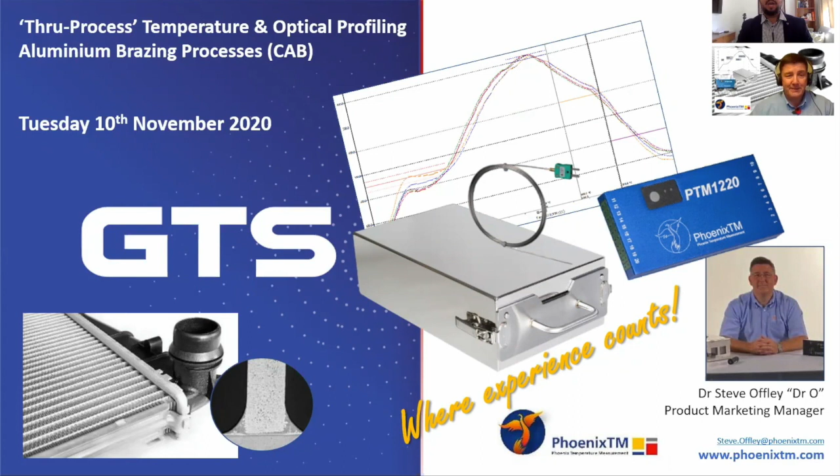So tell us a little bit about yourself, Steve. As you've introduced, my name is Dr. Steve Offley, but those who know me well probably know me more by my nickname, Dr. O. The O is because of my surname, but being in the heat treatment industry for over 25 years, I have worked with ovens and furnaces a great deal, so my nickname since the early days has been Dr. Oven. So Dr. O is what they call me, and that's who I am.

And I'm pleased today to present on through process temperature monitoring of brazing processes. As product marketing manager at Phoenix Temperature Measurement, my desire is to introduce new technologies into the heat treatment industry for monitoring and measuring both product and process temperature continuously, particularly for continuous ovens and also for surveying in batch applications.

Excellent. Yeah, actually the GTS expertise is in measurement, so this is just the perfect webinar to end this season.

Excellent. So, Dr. O, what are we going to see today? What are the contents of this presentation?

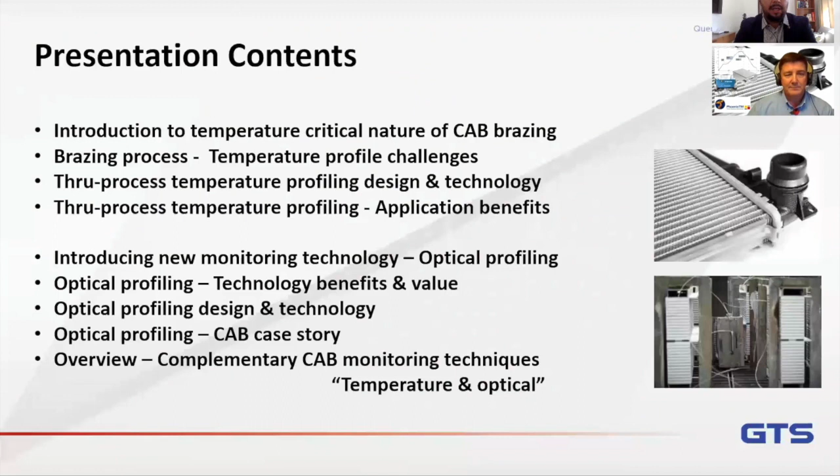Excellent. So the first thing that we need to discuss is the brazing industry. When we talk about industry, what kind of parts are we talking about?

Okay, so whenever we're talking about aluminium brazing, the first thing that comes to mind is the manufacture, particularly in the automotive sector, of radiators, condensers, evaporators, and a whole host of different products whereby you have an aluminium substrate which has to be physically manufactured by joining aluminium parts using the brazing principle. So using the filler alloy to complement the aluminium and create this permanent bond between aluminium filaments, whether it be the pipes or the fins in the radiator itself.

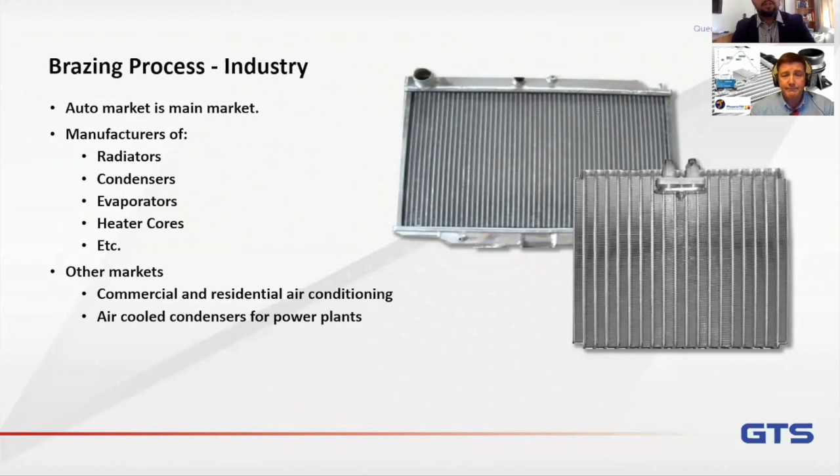Right, so there's one thing that we need to consider here.

In the past events about brazing, we talked about other materials like copper, bronze, stainless. When we talk about aluminum, we have a particular challenge, right?

We do. Well, the first challenge is you call it aluminum, I call it aluminium. So there we go, that's our first challenge of today's presentation.

But yes, the challenge you quite rightly allude to, Victor, is the fact that we're selectively melting the filler metal with the aluminium. So what we don't want to do is take the temperature of the filler metal too close to the temperature that the aluminium substrate or parent material could potentially melt.

That temperature window is quite tight in aluminium brazing, because typically the filler alloy is going to be melting between 580 to 620 degrees. And as we all know, aluminium will melt close to around 650, 55 degrees Celsius.

So we need to be fairly accurate as to how we control the temperature of that radiator to prevent potential damage to the substrate in the brazing process itself. But we also need to be able to control the temperature of the filler alloy so that it melts at the right rate, and then it flows, and with the capillary action, it fills the joint where you want the physical connection to be made, which is then reliable and will give the physical strength to the product post the brazing process.

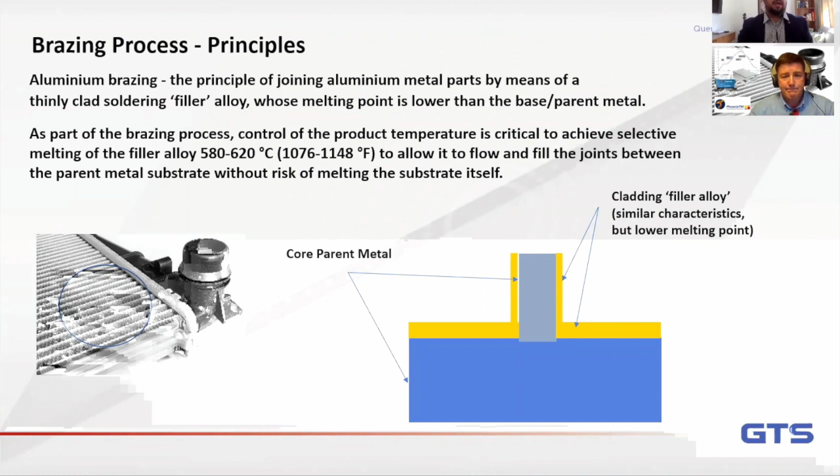So we need to talk about controlled atmosphere brazing, right? We are, and that's what the majority of this presentation will be on, is the monitoring of CAB processes, controlled atmosphere brazing, where you've got an environment inside the furnace which is being controlled to overcome the one pitfall of the aluminium brazing process, which is the formation of aluminium oxide.

Because if you don't control the environment inside the furnace, the oxide layer forming on the substrate itself will prevent the alloy filler metal from flowing correctly into the joint, and you won't get the good fixing and secure point between the pipe and the fin, which could cause degradation or failure in the field.

Correct. So in the CAB furnace, we're trying to remove both oxygen and water to avoid oxide formation on the part. But we're also going to be using flux technology to enable us to clean the aluminium surface itself, to remove any residual oxide post degreasing operations.

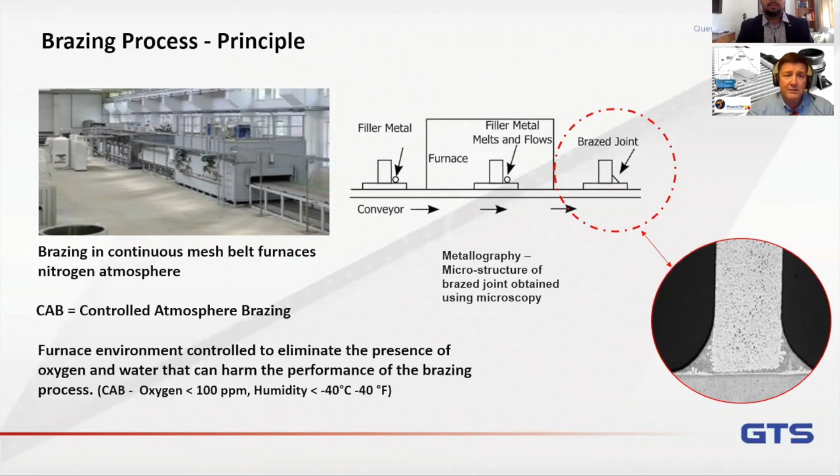On our first webinar of this season, we talked about vacuum brazing. The nice thing about vacuum brazing is that because of vacuum, you remove all the contamination by mechanical means. Although the problem with vacuum is that the production rate is limited. So most applications, especially in the automotive industry, will be run on a continuous furnace with controlled atmosphere brazing. So that's the reason we need to talk about flux.

So right now we already discussed temperature, atmosphere, flux, but there are other critical factors that we need to have in mind, right? There are, and I must admit I have to put my hand up and say I nicked this from somebody else's presentation, the 7 critical steps to brazing.

But the reason I put this slide up here is the fact that along with selecting the correct alloy and cleaning the material so that there's no oxide, there are 3 items in this list that are all temperature critical. So it just emphasizes how important temperature control is in the brazing process itself.

Now, furnaces come with fairly sophisticated control systems these days, but at the end of the day, you need an independent way of understanding what's actually happening inside the furnace. What's the temperature of the product? Because the furnace control system tells you what the ambient temperature inside the furnace is, but it's never going to tell you what your product is actually experiencing.

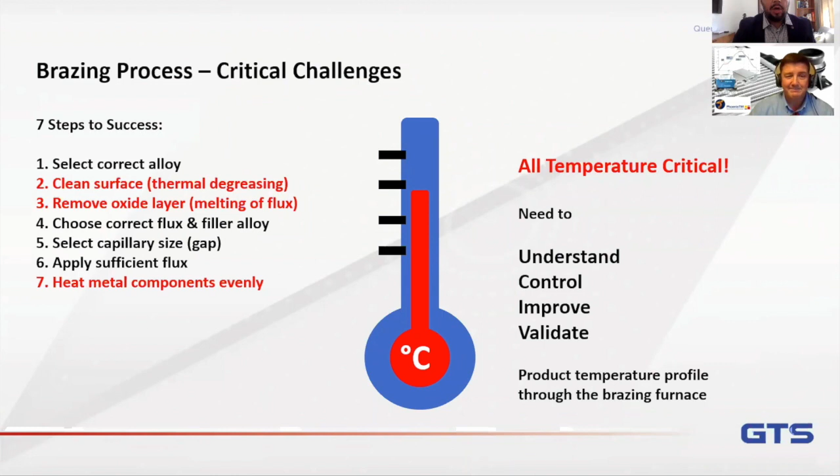So let's talk about chemistry and the thermodynamics inside the furnace. Certainly, Victor, as we discussed earlier, we're both chemists, so this is the sort of stuff that gets us excited. Yes, when you have big names for chemicals and chemical formulas, that gets me excited. We are a couple of nerds.

If we take that list of 7 things important in brazing, we've identified that 3 of them are temperature related. In the manufacturing process of brazing, the first major step is to perform thermal degreasing, to remove any hydrocarbons or lubricants that may be poisoning the surface of the product, because if that stays, it's going to cause contamination of the process.

Probably the most important thing is the use of the flux. This is basically, for instance in the Nocolok process, potassium fluoroaluminate, a chemical which eats the oxide layer and leaves the aluminium surface clean for brazing. The product will be sprayed or impregnated with the flux material, which then melts at 565 degrees. That's critical to surface preparation before the braze process.

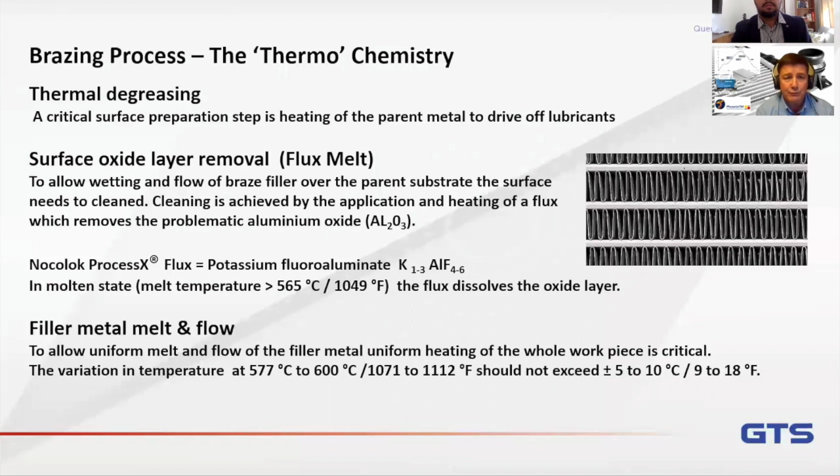Over the past webinars, we've discussed that it's bad to have too much, and bad to have too little. Too much temperature is bad, too little temperature is bad, too much time is bad, too little time is bad. So this is a process that has to be almost perfect. That's the process we're dealing with.

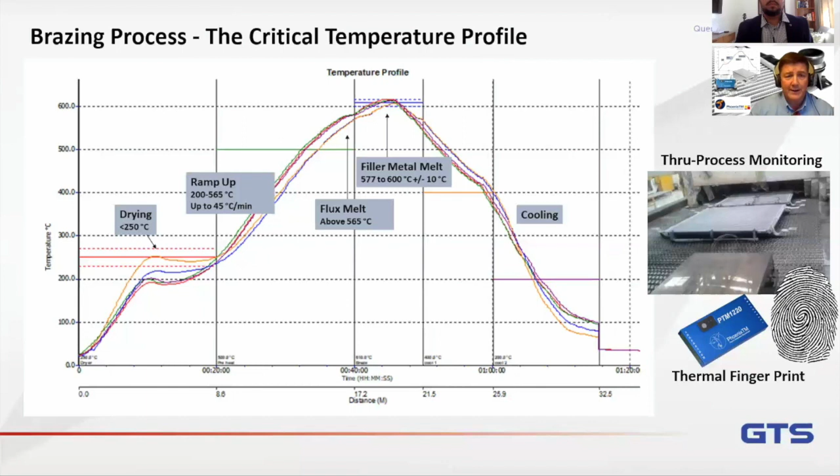That data can be invaluable to understand possibly when things are going wrong in the process, as we'll discuss in more detail later. Correct.

Talking specifically about profiling or temperature profiling, there's a couple of challenges we need to have in mind. Obviously, if we're going to send the data logger through the furnace, we need the thermal barrier, as I've explained. Now what we don't want to do is, by the process of actually doing the monitoring task, influence or affect the actual environment inside the furnace, because as its name suggests, controlled atmosphere - we want to keep that controlled environment in the furnace.

Now traditionally, thermal barriers - the traditional design, which are made up of microporous insulation and glass cloth - can perform an operation we refer to as outgassing. So air or moisture inside the material can actually escape the barrier, and that would then poison the environment inside the furnace. The last thing you want is any air, oxygen or water getting inside an environment where you're trying to remove or prevent oxide formation on the aluminium. So we need to make sure the barrier doesn't contaminate the process itself.

At the same time, the flux material we're using to remove oxide from the aluminium surface - that chemical, if it comes into contact with moisture, can form hydrofluoric acid. That is obviously a very corrosive acid, which doesn't particularly treat things like microporous insulation or glass cloth very kindly. It will eat it away.

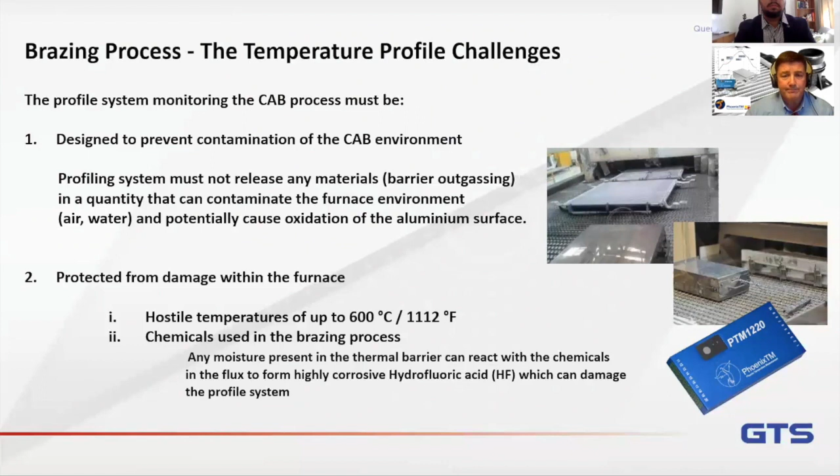Regular thermal barriers that we use are usually focused on traditional heat treatment environments, where in most cases the atmosphere isn't a problem, especially when you're doing vacuum - well, there's no atmosphere, so that's not an issue. But here we need to have in mind the design for the thermal barrier specifically for this type of brazing.

And obviously, the last thing you want is for that dust or material to escape the barrier into the furnace environment, because you're going to create a dust risk or a contamination risk at the brazing or melting part of the furnace process.

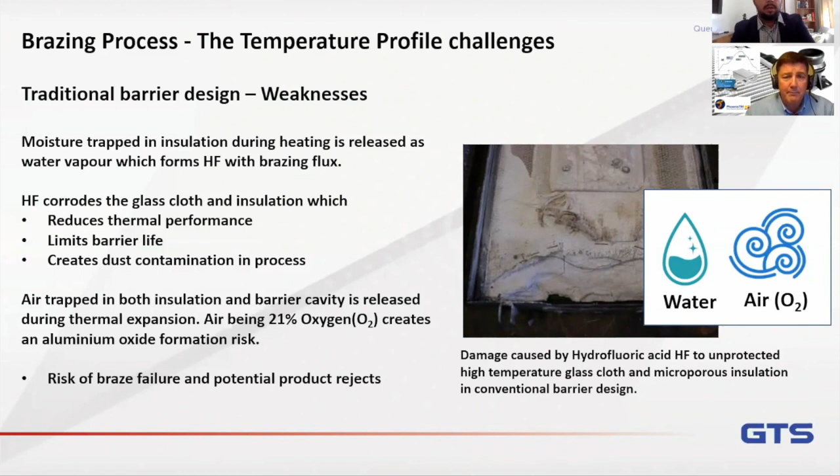So it removes the risk of deterioration of the thermal barrier. The barrier is designed so that in the manufacturing process, it's heated in a vacuum furnace and flushed so that any air inside the material is removed. You can also flush the system before each run to backfill with nitrogen gas, eliminating the risk of any contaminant, oxygen or air inside the barrier escaping as it travels through the furnace.

By the way, do you recommend doing that also for other types of thermal barriers? Brazing is probably the most classic example where this is beneficial.

The obvious downside is you're always fighting in thermal barrier design as to how to reduce conduction effect. Now, if you put metal around the insulation, you're creating a thermal pathway into the barrier. So we had to be careful how we created that balance between the robust nature of the barrier plus the thermal performance.

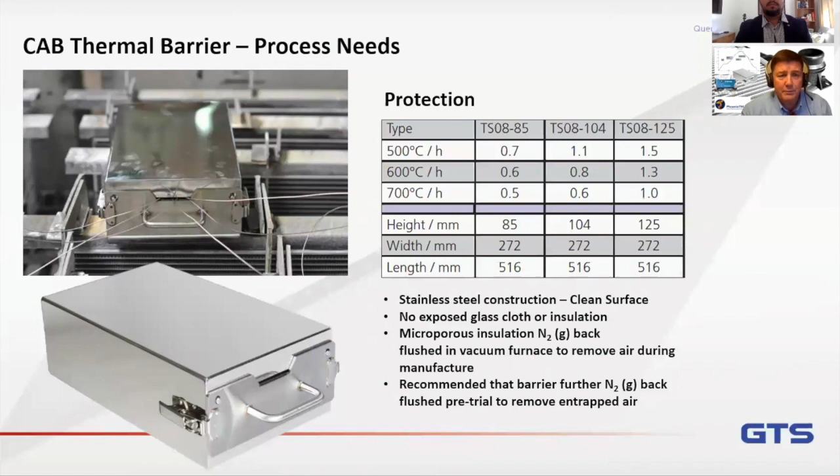But the front drawer type design where you've got the encased insulation is ideal for this sort of brazing application. As you can see from the table, different sized construction and barrier sizes will give you a variety of different thermal performances to match the type of brazing process, the time and temperature that you need for your particular product manufacturing step. I see, thank you Steve.

So we talked about the actual design or engineering behind the thermal barrier, but going back to measurement, one thing we need to have in mind, very important, is the characteristics of the thermocouples. There are many varieties and construction of thermocouples, but when dealing with atmosphere, probably the mineral insulated thermocouple is going to be your best option, right?

It is. That's the thermocouple type we would normally recommend - the mineral insulated thermocouple. Typically a type K thermocouple, which will give you the accuracy we're looking for if it's a special error thermocouple, typically 1.1 degrees Celsius or 0.4%, depending on the temperature you're reading.

It's interesting, thermocouples tend to get overlooked a little bit in any temperature measurement process. My advice to anybody is don't take shortcuts when it comes to thermocouples. You often hear the phrase, a bad workman blames his tools, and often the thermocouple gets blamed for a lot, but it's generally because it isn't being used correctly, or it's not being cared for carefully enough.

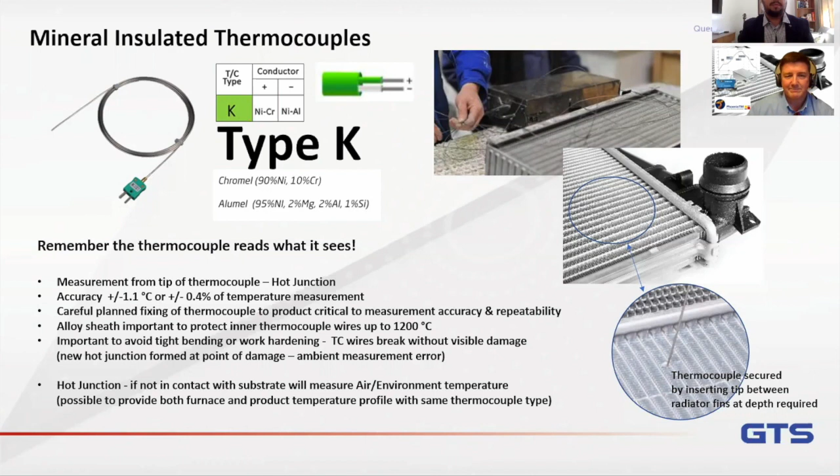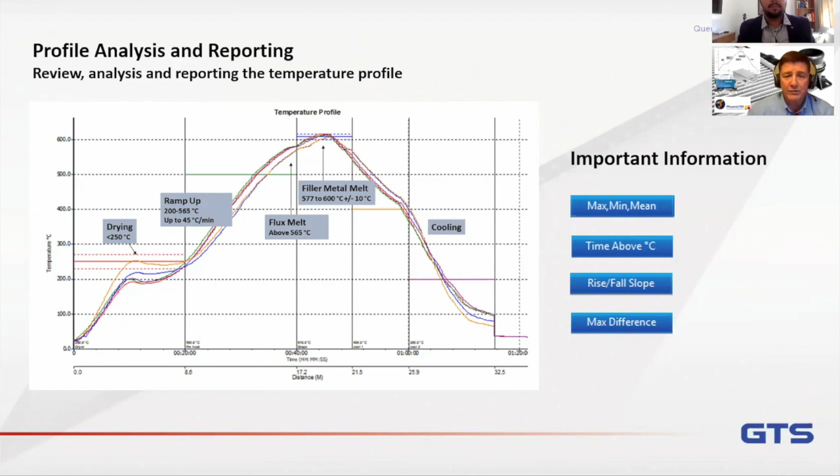Okay, enough of thermocouples. What is next, Steve? Okay Victor, so we mentioned a couple of slides back the profile and how important the shape of the profile is to understanding how the process works. From that profile, there's certain calculations or data you'll need to particularly focus on in order to fully understand whether your braze is being satisfactorily achieved, which we'll look at in more detail on the next slide.

So we've talked about absolute temperature - am I achieving the right brazing temperature, am I achieving the right temperature to melt the alloy? But we've also got to be careful that we've got good control of the heating rate of the process, particularly when we talk about the flux process, which is critical to the surface preparation of the aluminium. If you don't heat that at a uniform rate, if you heat it too slowly, the flux material will dry out preferentially and become less effective in performing that cleaning operation on the surface of the aluminium.

The actual brazing temperature, the critical peak temperature of the profile itself, is obviously critical, and we're looking for uniformity. What we don't want to do is exceed that temperature too greatly, because then you may end up getting close to the aluminium melting temperature, and we can get what we call filler metal erosion, where the alloy metal starts to eat into the aluminium substrate surface itself.

Uniformity across the product is essential, and typically we're looking for a minimum spread of less than plus or minus 5 degrees Celsius over the product itself.

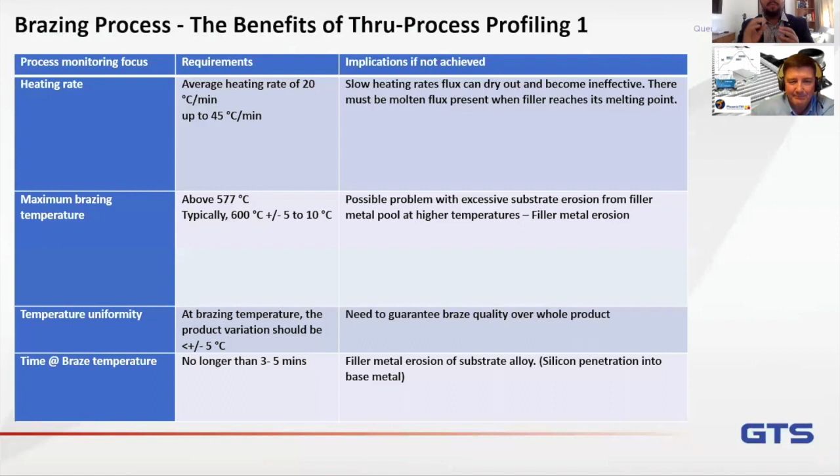I'm sorry, I need to bring that up. Yeah, we get this so many times. But you have a really good point. What can we do to optimize a little bit better our process or our profiling?

Okay, Victor. So obviously, if we're able to measure the product temperature through the furnace, when we're talking about uniformity, we're talking really in this particular case, not the uniformity of the furnace, but we can also use the same technology to talk about uniformity of heating at the product level.

Okay, so different products, obviously different sizes of radiators will heat at different rates. So we can use the profile to see how our range of products vary within each and every furnace, and you may want to then customize your control of the furnace to reflect the type of product you're doing.

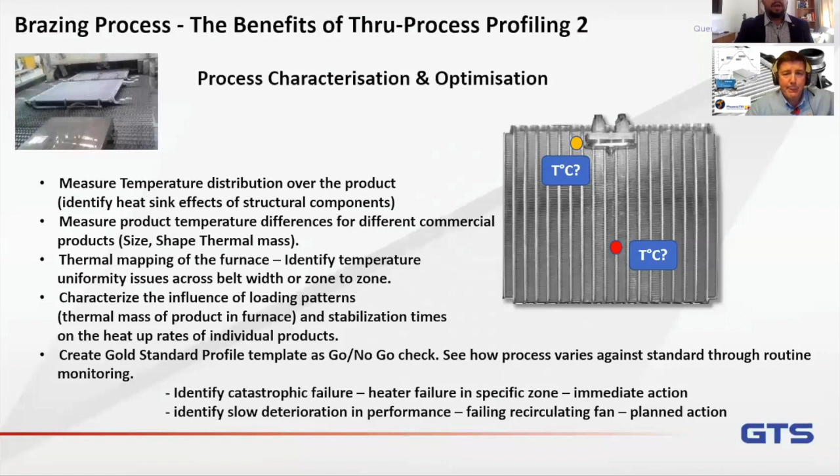Perfect. So I think we have covered so far everything related to temperature profiling. Do you want to go do a summary about this?

Very quickly, Victor, yes, I think hopefully we've shown how important understanding the product profile, the temperature profile of the product in the furnace, is based on the brazing application itself. But obviously it's not an easy application to monitor because of the flux inside it and because you need to control the atmosphere. So you need a technology that isn't going to poison the environment so you can control the atmosphere without any hindrances, but you also want a system that isn't going to be damaged by the hydrofluoric acid potential risk inside the furnace if there's any moisture or air inside the materials.

Because if you've got HF and the traditional type of barrier, you're then going to end up with some corrosion problems, which will affect the long-term efficiency and reliability of the equipment.

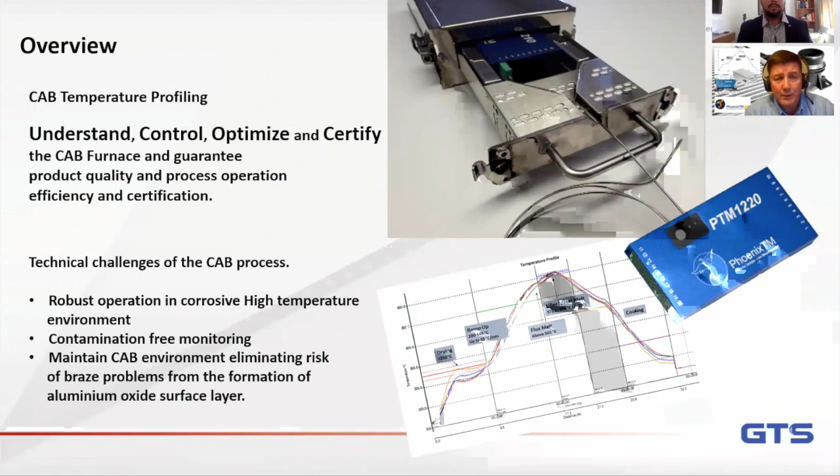Excellent, great. So this is basically all that we have in relation to temperature. But we are looking at this new technology about optical profiling. That's something new. Can you tell us a little bit about that?

Yes. For many years, we've talked about temperature profiling as a means of understanding what happens inside the furnace. But obviously this is focused purely on the temperature inside the furnace. Obviously the furnace operation is to achieve a set temperature on your product, but that's only part of the story. So a lot of customers said, I wish I could get inside the furnace to see exactly what happens or what my product sees. That would be nice.

For a long time, we've been playing around with the concept of, if we can get a data logger through the furnace, why can't we get some sort of video recording device through the furnace safely to see exactly what the product sees as it travels through on the mesh belt? So this is basically what optical profiling is. Instead of measuring temperature, we're actually capturing a video record of what happens inside the furnace.

But the best analogy I can make is it's a bit like your dash cam on your car. Everybody drives along collecting video footage of what the car sees traveling down the road. The optical profiling system does exactly the same thing, it's just the fact you're driving down a brazing furnace at 600 degrees Celsius, which brings its own challenges, as you can imagine. I don't advocate you try and drive your car down the furnace, because it won't work.

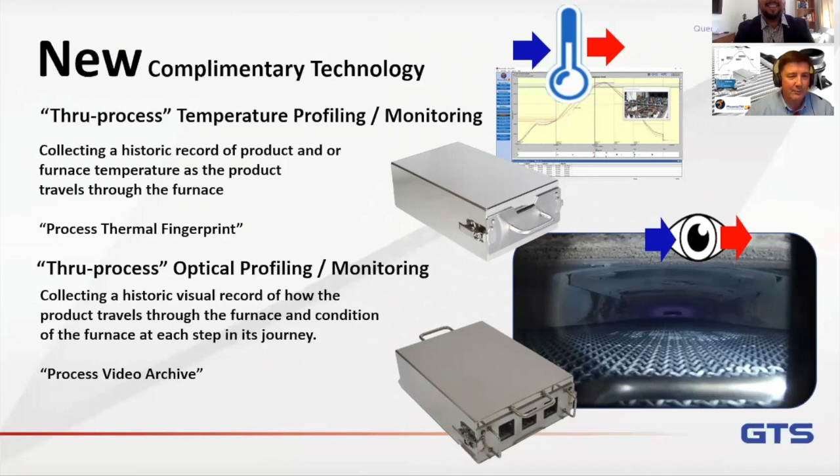So tell us a little bit, what's the difference of the thermal barrier used for this kind of profile? What we've done is adapted the thermal barrier design that we've used historically for the temperature profiling device and modified it to allow the transfer of both a high resolution 4K video camera and also illumination in the form of a torch or torches. So the thermal barrier is designed so that the torch and the camera can travel through the furnace, again, at operational temperatures, so up to 600 degrees.

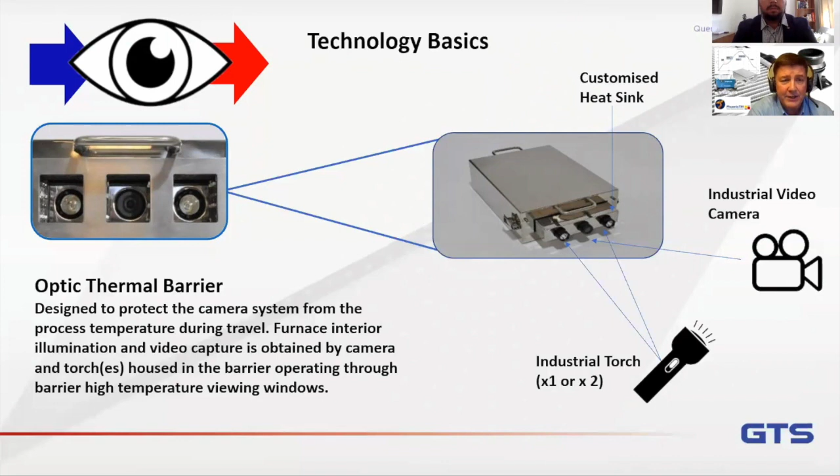We're typically trying to keep the temperature internally within the barrier at around 70 degrees or less, because that's the operational characteristic of the video camera itself. We've been fighting with the challenge of how you get an optical pathway between the camera and the actual environment you're trying to capture, while maintaining thermal performance and protection of those temperature-critical bits of technology. So as you can see here, the barrier has been adapted with windows to allow observation and video capture in a safe environment.

I see, this is quite interesting. So what will be the benefits of having an actual visual inspection of the furnace?

Because we're able to send this through the furnace under operating conditions, you get instant feedback from the furnace in the production flow. Normally furnace inspection requires you to stop the furnace, dismantle panels, have somebody visually go inside with torches and have a look. That's not under production conditions, and certainly not while you're putting product through. The nice thing is that you're doing the monitoring instantaneously under production conditions, with no delay to production from having to stop the furnace, cool it down, and dismantle it to have a look.

And the other nice thing is that it's a complementary technique to what we're already doing with the temperature profiling. We can collect the temperature profile, but also show physically what happens to the product in that same environment, because the quality of the radiator at the end of the day is often a combination of not just the thermal characteristics, but also how effectively the product was transferred through the furnace. Did it travel through smoothly, or was there a rocky passage because of an unstable mesh belt? Is there any possible damage to the brazing process itself through movement of the product, as we'll see in a few minutes?

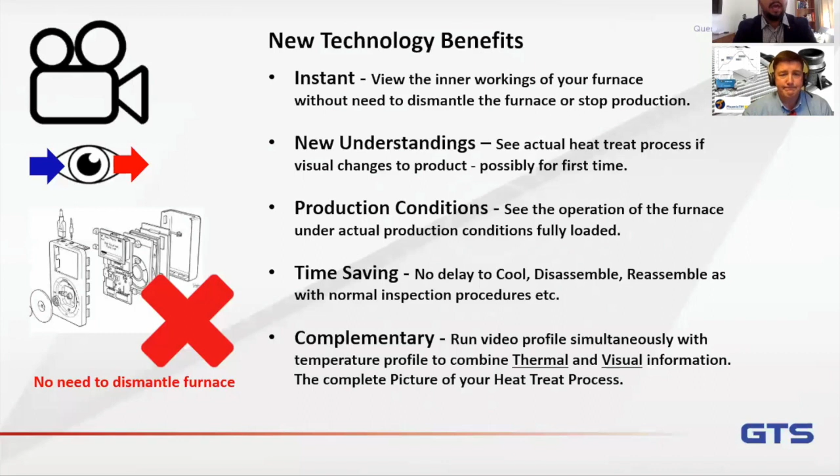I think this is a very useful tool, specifically for high production environments when we don't have enough time to find out what's going on, instead of shutting down the furnace, waiting for cooling, and having the production manager pressuring you to keep the furnace running all the time. This will be a really nice tool to do a root cause analysis instantly, like within an hour or two, and say: okay, this is the problem, this is what we're seeing in the temperature profiling, and this is what's causing it.

Everybody in a production environment has to at some point do 5-why analysis, root cause analysis, trying to find the true root cause of a particular problem. You start with the symptom of radiator rejects, identify the problem is due to poor braze, and find through temperature profiling that the temperature in zone 4 is lower than it should be. But why is the temperature lower? If you use the optical profiling system, you can possibly identify the physical characteristics inside that zone that identify exactly what the problem is.

As we're always taught in these environments, especially from the Japanese, they tell us to go to Gemba, the real place where the problem occurs. You can't get any closer than that with an optical system, where you're taking yourself completely to the point where the problem exists inside the furnace.

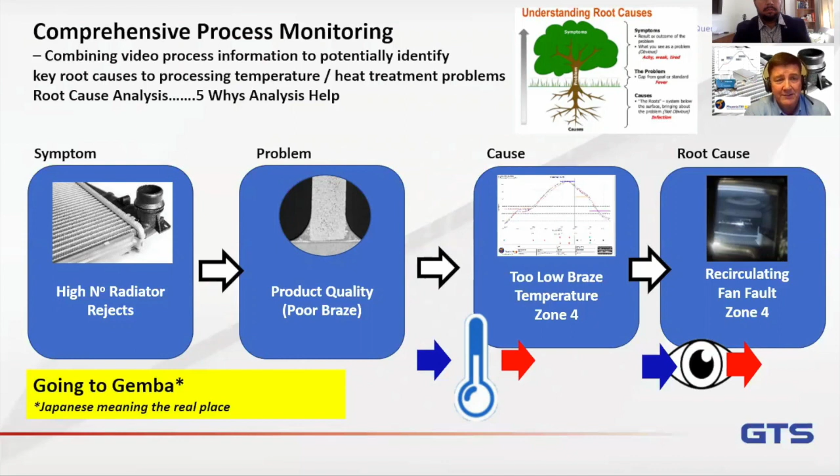So if we go over to actual problems, what could we find with this profiling system? What is it that people want to see inside the furnace? It's split into a few sections. The first, probably one of the most important, is: what's the condition inside my furnace?

Particularly for older furnaces that have been in commission for many years, there may be a need for repair. You need to be able to see internally what the condition of the furnace walls are. You can't necessarily do that unless you've dismantled a furnace, because you're disrupting the actual operation in the process of taking it apart. So if you can see that live in a production environment, you can spot gaps, corrosion, damage to panels, or misaligned ducts.

Or if in the process there is some contamination from the actual process you're doing, which is a classic example of brazing, where you've got flux buildup, you can identify where that is.

The second one is how effectively is my product being transferred through the furnace itself. The mesh belt is obviously designed to take the product through smoothly at a steady speed. Supposedly, but in a brazing environment where you've got stainless steel mesh belts, they can get distorted, buckled, and warped. That will change the characteristics inside the furnace somewhat. And if you can see that visually, you can identify when you need to change that belt or do some repair work.

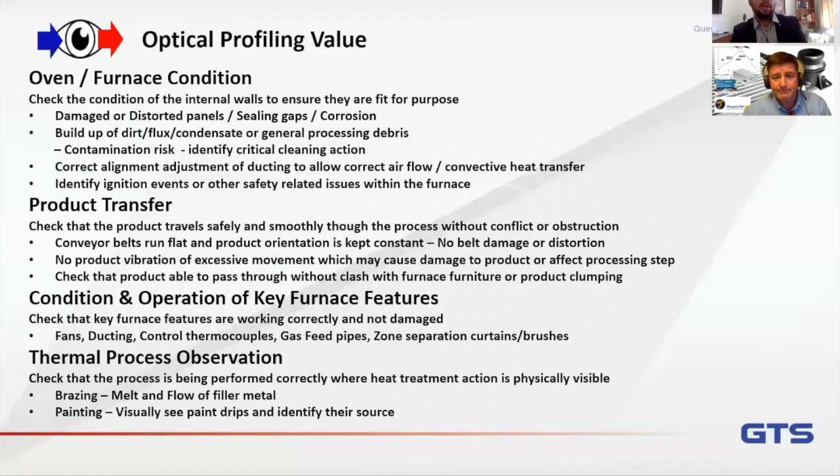If you take a dive into YouTube, you can find some videos of the actual filler metal going into liquidus, but that's in laboratory conditions. Yes, it will be really cool to actually see that happening in your furnace and see what's going on there and how it works. So I think this is really exciting.

I agree, so I think you have really nice pictures here - for example, flux buildup, that looks horrible. Unfortunately, that's a byproduct of the nocolok process, where you're putting in the flux to clean the surface. At temperature that's fine because it's in the gaseous state, but when the flux hits the back end of the muffle furnace, in the cooling section, those chemicals condense out of the gaseous phase into the liquid and solid phase, and start to collect on the cooler areas of the furnace, creating this sort of stalactite-type formation, which when I saw it for the first time, I was blown away as to how problematic that could be in practice.

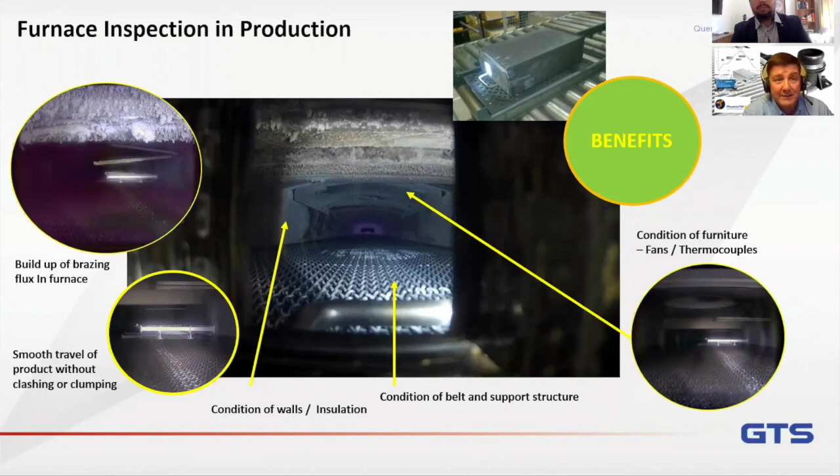And the control of that is obviously a big headache for many people day in, day out in this type of industry. But you can see here classic examples of the sort of things you can see inside the furnace, whether you're looking close up or down the length of the furnace.

You can see immediately - also these are static, but in a real life situation where you've got moving images, you can see how the belt is moving. Is it flat? Is it tilted? And we'll talk about that in the next couple of slides.

So I think you have a really nice example here of what kind of problems we can solve proactively if we have this kind of equipment. The thing about flux buildup at the end of the furnace, it's something very common in these environments, right? Sure, and unfortunately if the flux was to build up uniformly, it would probably be fine, but it doesn't - there's going to be colder areas of the furnace. So the flux will build up preferentially in one area, and it can actually cause a challenge for getting the product through.

Now you can see the flux here on the roof of the furnace, but probably the more difficult challenge is where the flux builds up under the belt, because that then starts to affect the stability of the mesh belt itself and the level of the belt. And if you've not got a level belt, you're never going to get a smooth transition of your product through.

If you're trying to create this flowing characteristic of the braze alloy metal as part of the application, that's going to be affecting the quality of that whole process. Of course, per se.

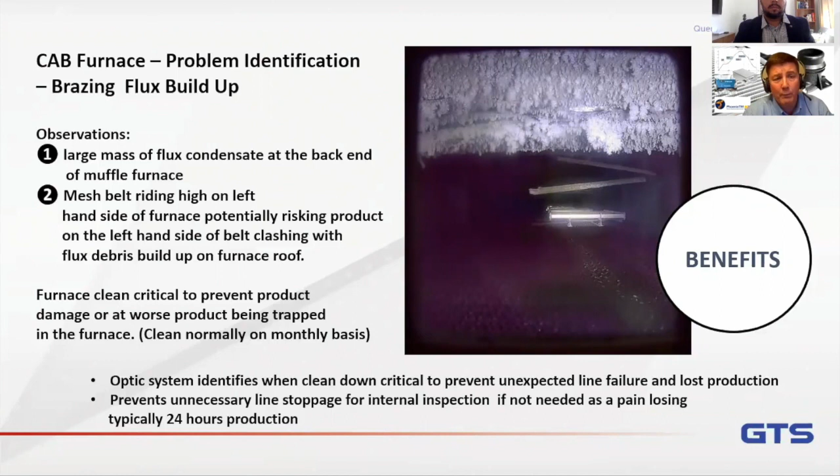So the big challenge is we all know that flux builds up, but how do we manage that? This is where process engineers have to work in tandem with maintenance teams, because the engineers want to keep their furnace up and running as much as they possibly can. They know there's going to be a clean down requirement, maybe on a monthly basis, but every time that step is triggered, it means you have to cool the furnace down, and it can take 24 hours out of the production schedule. If you're closing your furnace down on a routine basis, whether you need to or not, that's got to be detrimental to your productivity and production throughput.

Now, with the optic system, you can see when you need to do a clean down, rather than being forced because it's the last Friday of the month, so we're going to clean the furnace down whether it's needed or not. But on the other hand, if there's a significant buildup of flux which you don't even know is happening, if you wait another week you may end up with catastrophic failure in your process. I've been to certain sites where people aren't able to get their radiators through the process because the flux is building up so much, and you've got people looking down the furnace with torches to see where the problem is. Now the nice thing about the optic system is you send it through and it will show you immediately where you've got areas of concern.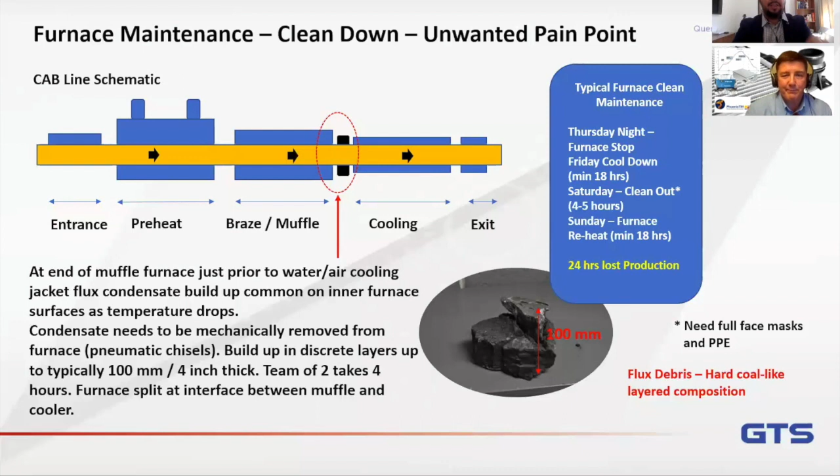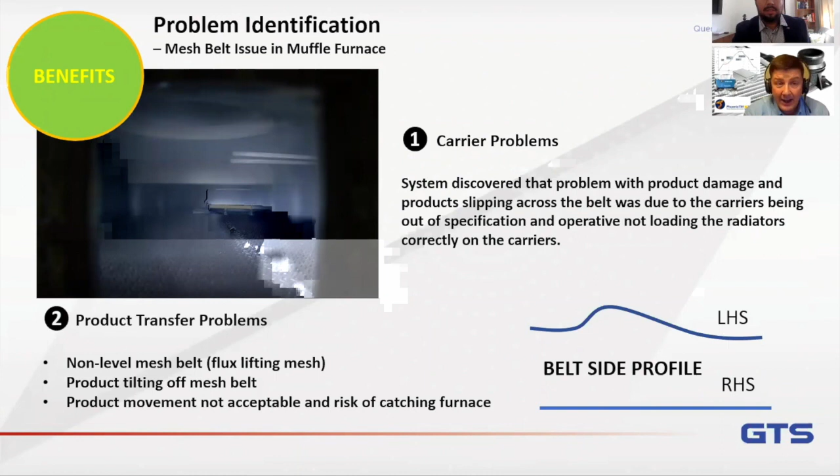So I think another good benefit about this technology is finding out what's the condition of the belt, right? The mesh belt is often a headache for many maintenance engineers - is it moving, is it smoothly running through the furnace? It's not a cheap piece of equipment, so if you want to replace it, it's a major cash draw, a major investment. So you want to know when the right time is for either doing a repair or replacing that mesh belt. Now with the optic system, you can see throughout the whole of the furnace whether you're getting a smooth transition.

I've seen from video clips from customer sites where you're not seeing a level transfer. It's almost like the Big Dipper at the fair, the roller coaster. Sometimes you can actually see the radiators tilting or lifting off the belt because there's been a dip. Now that's classic of either the infrastructure or structural framework underneath the belt being damaged, or the buildup of flux underneath the belt, which is hindering the smooth transfer of the belt through the furnace body itself. So if you can see whether or not you've got a smooth transition, it has to be helpful for controlling that brazing process happening on the belt level.

Yeah, that's a really nice point. We usually, at the end of the process, sometimes have problems with low coverage and we're wondering why - well, because your part went through a roller coaster. So it's a mechanical issue, it's not even about brazing or temperature or atmosphere, it's actually a mechanical issue that you couldn't see before. Yep, and that's the sort of thing that every time we put the optic system through a furnace, we're learning something new about how the furnaces are working. It's incredible.

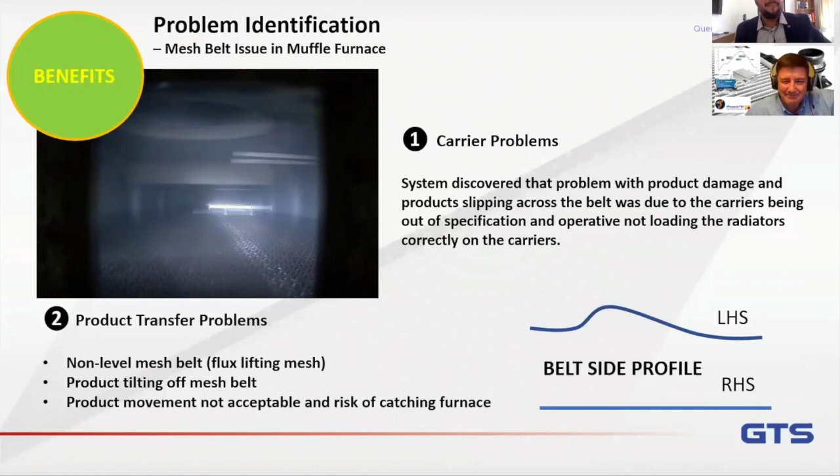So let's summarize this process. Complementing the temperature profiling system we talked about at the beginning, optical profiling lets you see live from inside the furnace exactly what's happening. You can identify the condition of your furnace or oven, see how your product transfers through, whether it's smooth or not, and whether the furnace features are working correctly. You can identify any damage, including to the structural integrity of the furnace, or any contamination, such as the flux debris that builds up inside a typical aluminium CAB brazing furnace. You may also be able to observe the thermal process itself if there's an observational characteristic to it.

And obviously all of this is done automatically as part of the production run, without any need to stop the line, dismantle the furnace, or wait 24 hours to cool it down and another 24 hours to heat it back up, which are the challenges when you're heating at 600 degrees or even higher. Hopefully this is a new emerging technology which will find more applications in the future. From a brazing perspective, it shows people how effectively the brazing process or their furnace is operating from a mechanical standpoint. This is really exciting.